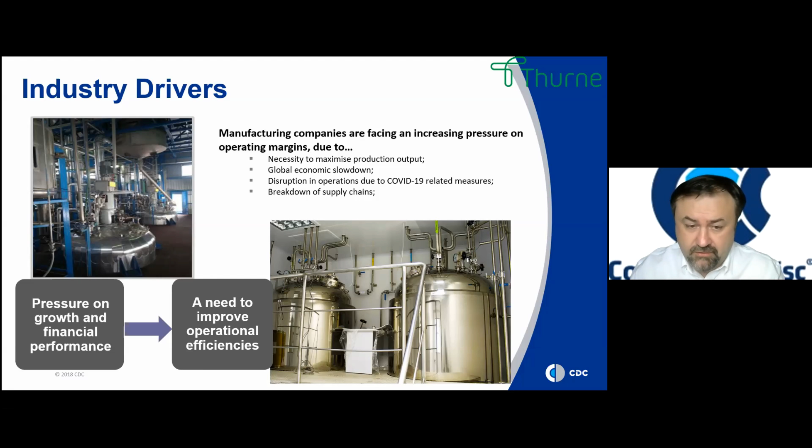And what's been happening as well, our supply chains are affected by the situation. So all of this, in essence, translates into an impact on our bottom line, on our profitability as companies, and that's the primary reason we all exist. All this pressure on financial performance, a part of which we're going to examine, can be addressed through improvement of operational efficiency. The more efficient we become, the less pressure we have on our financial performance. There are other aspects of financial performance that have an impact, but we're going to concentrate today purely on operational efficiencies.

And so we all need to be more efficient. What does it really mean for us? It means we have to be more productive. So we either have to produce more stuff, or do it within a shorter period of time, or do it constrained by a lot of other factors. Interestingly, one of them is going to be operational expenditure. The more you're trying to manufacture, the more it costs us to do this. And the whole theme behind today's conversation is: do rupture discs, being a small safety device, play any role whatsoever in this chain of events that we're trying to accomplish? So let's have a look.

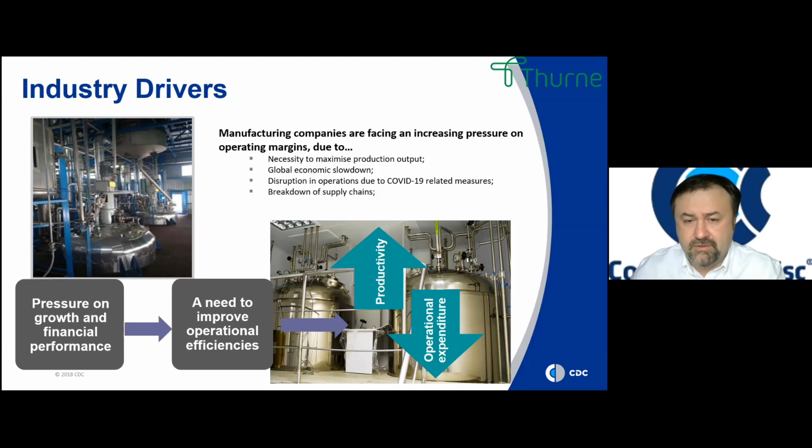So in terms of productivity, the way we see it as manufacturing plants, productivity means, as I already touched on, either increasing production uptime, so we're making more, or increasing the throughput, using the same amount of hours, the same equipment, the same facilities, but producing more of our goods. Part of it is also reducing product waste, which is quite important. The more we waste, the less we produce. So all of it is pretty basic and logical, I think.

But at the same time, any intensification of manufacturing has a detrimental effect on the equipment that we're using. So we're talking about wear and tear. We're talking about our industrial controls getting more compromised as we load them with more tasks. And this translates into expenditure in terms of the cost of new equipment, the cost of maintaining it, and also, interestingly, it sometimes produces waste as a result. The less you control your process, the more opportunities to produce waste, and that's what we're actually trying to reduce. So it's a constant struggle between the two. What we're trying to do is, of course, maximize productivity and minimize the expenditure associated with it.

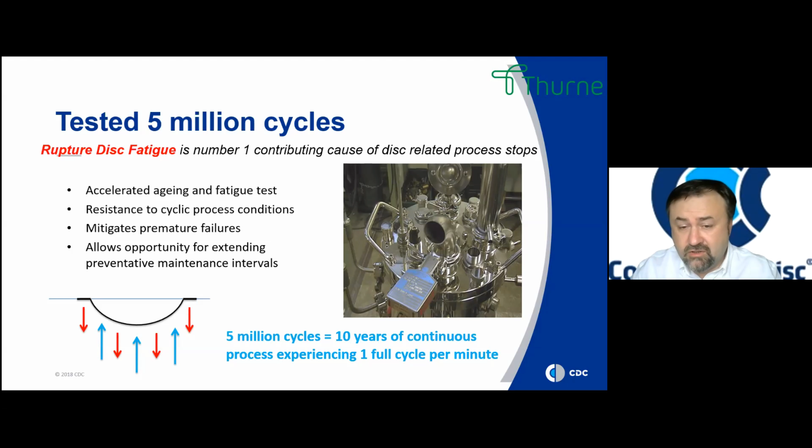So in essence, the 5 million cycles test, besides being a very large number, let me put it to you in a different perspective. It means that if you have in your process one pressure cycle per minute, from full vacuum up to maximum operating pressure, the disk, if we remove other aspects like corrosion and variations in temperature, should last over 10 years in a continuous process.

Now think about this. What impact could it have? What opportunities can it give us? Maintenance periods, more reliability for our production and manufacturing process. How much does it cost us to stop for half an hour, let's say 1 hour, while we're changing the disk? Those are questions we must answer for ourselves first. But that is how we prove it.

5 million cycles. I don't think 10 million cycles would matter much in this particular case, because I don't think there are processes in the process segment of the industry that experience such heavy cycling. After 5 million cycles, we simply stopped and decided to check, and the disks were still performing as intended.

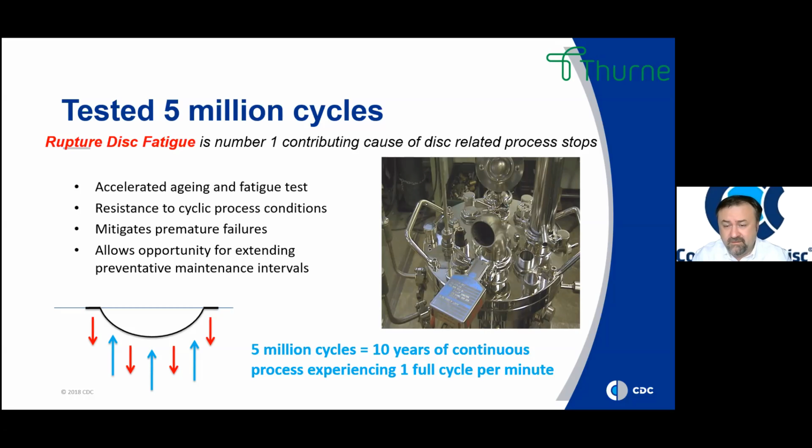100% operating ratio, that's another thing which is very important. What does it mean? Typically, with rupture disks, everybody gives you a formula: this is your burst pressure, bracket minimum, maximum, or plus minus. And we would typically give our customers a ratio depending upon the design of the disk. For example, your maximum operating pressure equals 90% of minimum burst pressure. This leaves you with a 10% gray area.

In essence, as your operating pressure starts crossing into that gray area, you accelerate the fatigue of the disk, and as a consequence it risks failing prematurely. We've perhaps all experienced a manufacturing process designed to do one thing, but over the years our products and operational conditions have changed, and we find ourselves starting to exceed the operating pressure limits, which again starts to affect the performance of the rupture disks.

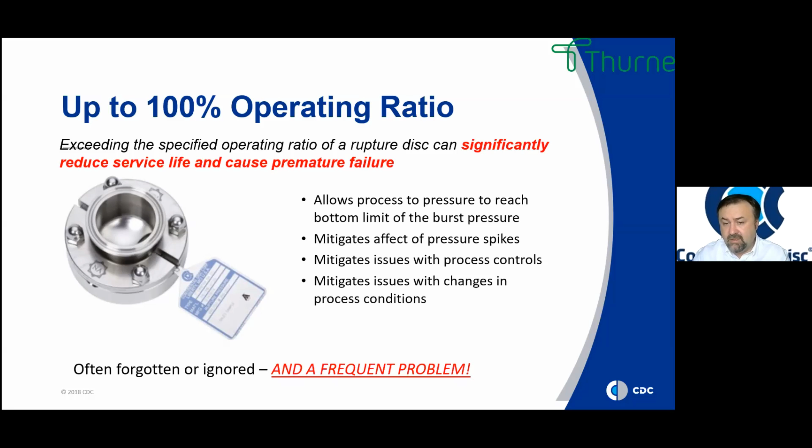With up to 100% operating ratio, we eliminate this problem. Instead of trying to control our process better, we can simply say, okay, we know it's not like the original design. Instead of compromising our operations, we simply use a safety device which is not sensitive to this, and focus on what we do best, manufacturing our own products. So again, reliability through cycling resistance, plus insensitivity to pressure spikes, issues with industrial controls, or changes in the process.

Number 3 is precision performance. We must never forget about the safety factor, because, as I mentioned, rupture disk burst pressure is represented in min-max brackets, since it's very difficult to manufacture a pressure relief device which always bursts at exactly the same pressure. ASME code, for example, specifies plus minus 5%, which is normal and typical in the manufacturing process.

But if we combine our HPX family with precision, remember, HPX 95 can come with a 0% range, because that's another thing we can add on top. A number of rupture disk manufacturers will say, okay, I can deliver you a very tight tolerance, but it will be in a wider range.

But that's not what the HPX family of products has been designed to do. It will burst within a bracket specified on paper. And what it gives us, with a 100% operating ratio, is that you'll never compromise the safety of the process, but it also allows you to bring the maximum operating pressure of the process up. Or you can say, okay, with this new product, I would like to still stay on the same level as the original rupture disk and have a bit of a safety margin at the top.

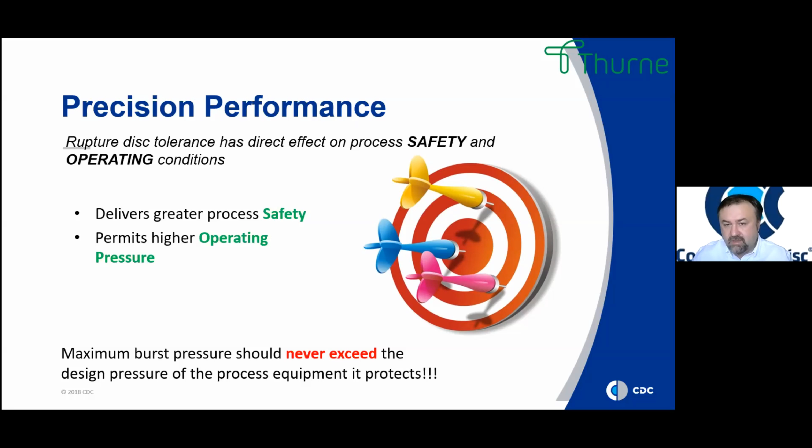And coming back to one of the last things I wanted to talk to you about from the design aspect is the platform that we're using. So we use the HPX platform within holder solutions, like shown on the screen. It has a lot of safety features, which prevent our maintenance crews from installing it the wrong way or in the opposite direction. So there are a lot of features associated with this. But this platform also extends to our low pressure designs, and we have a sanitary variant of HPX as well. So it does deliver benefits to probably 95% of rupture disk requirements, the 5% being ultra high pressure and ultra low pressure requirements, for which there are different solutions. But that is quite rare, and specific to certain industry segments, not the general process industry.

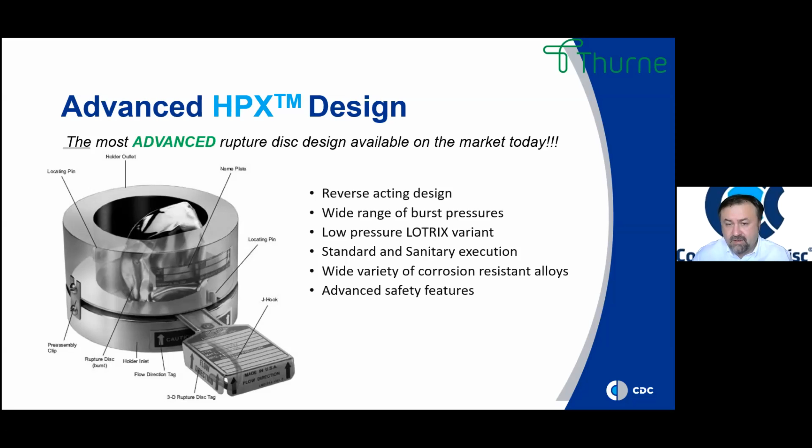And what this platform means as well is that through our new product development, which is continuous, we will be adding new features to this. And once you already have an HPX platform, you can, in the next 20 years, benefit from various new solutions that we're rolling out and planning to roll out on the market. So all this together: remember, fatigue resistance, less sensitivity to changes in operational pressure, and precision bursts. All of this positively impacts reliability.

So at the end of the day, what are we achieving? In layman's terms, if you put in a more advanced disk solution like HPX technology, you will need less maintenance. It will significantly improve the reliability of your plant, so significantly reduce the risk of any downtime whatsoever. It will be more accommodating to any breakdowns in the process controls, or perhaps any inefficiencies in process control, shall we say, and still deliver an unprecedented amount of safety. So you're not going to compromise anything. And all of this comes at reduced cost, because you will need fewer disks, you will need to carry less stock, and you need to do less maintenance on it.

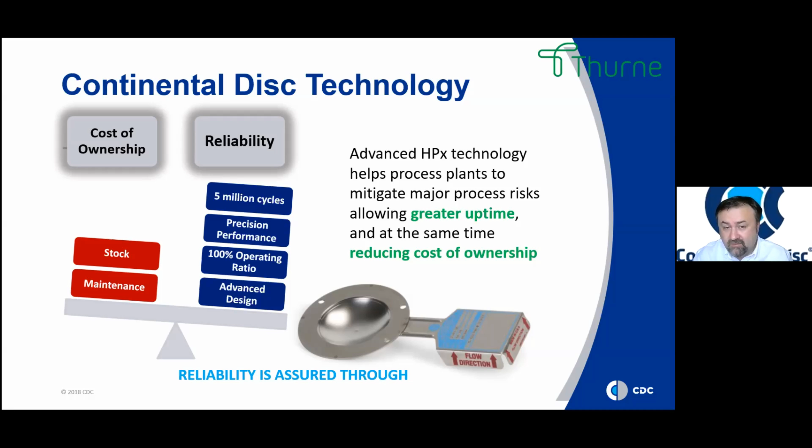So all of this combination allows us to actually achieve our original goal, which is to increase the productivity of our plant. If we don't experience any premature failures, and we don't have to stop for maintenance as often as we used to, here you go, a straight direct impact. Unfortunately, we cannot impact all the other equipment, but I'm sure our colleagues in other industry segments are working on it as well. And it comes together as what we like to call a partnership, because this is not the only thing where we say, okay, here's this technology, here's the benefit to your process. It doesn't stop there.

For example, if you forget to order spares and find yourself without any spare rupture discs, our manufacturing capability gives us the ability to manufacture and deliver spare discs to you within 24 hours at very little cost increase, quite frankly, compared to anything on the market. Why? Because, especially with HPX, it's what we're geared to build. That's what we're delivering to the market right now. The HPX family, for example, and the majority of our products comply with all codes and national standards. So when you go through a validation process, you should not worry about that aspect. Service, again, we have excellent partners such as Thurne Group.

And being an American manufacturer, we still have our own big customer service team in Europe and engineering team in Europe. So we can address any needs straight away, without having to wait for differences in time zones.

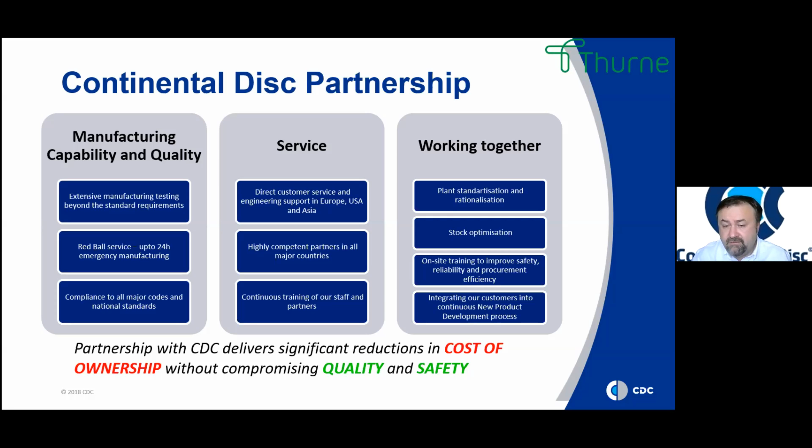So what we like to say is that the partnership with us can deliver and will deliver significant reductions in cost of ownership without compromising the safety and the quality that is quite important for our plants. So we're coming to the end of our conversation. I hope you managed to see the link between the rupture disc performance and operations of the plant.

But the main takeaways, if I want to summarize, that I would like you to take from this all is rupture discs do have an impact on your manufacturing process. Sometimes it's significant, depending on what you're doing and how you're doing it, what your manufacturing process is, but it will still have an impact on your operational efficiency.

Now, what we're proposing, our technological solution to this, is not a kind of stopgap, quick fix, temporary thing until all these negative effects of the world at the moment, like a pandemic or economic slowdown, pass. And then after it all blows over, we are back to our normal selves. No, this actually allows you to have permanent improvements in your process, both safety, reliability, and impact on your productivity. So if you think about your plan for what am I going to do for the next 20 years, well, this is what you're going to do.